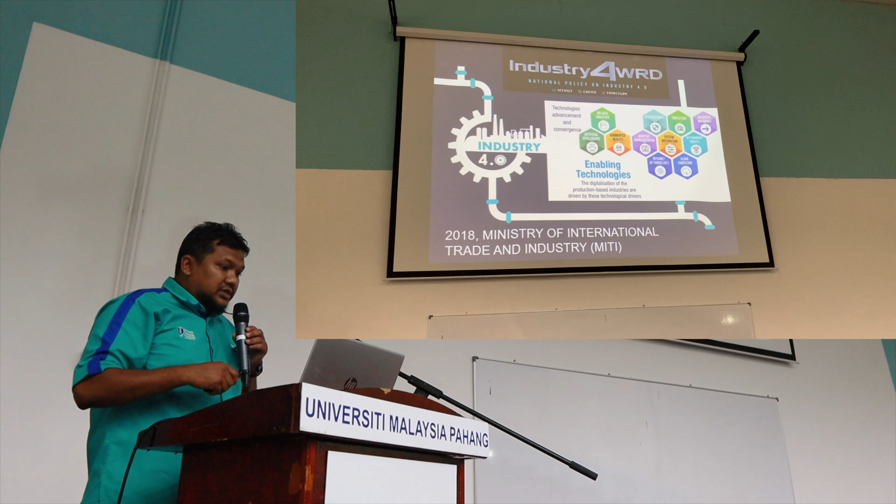Okay, about Industry 4.0. In Malaysia they have a national policy, officially launched last year or two years ago, about Industry 4.0. So here are all the enabling technologies. Most of us should prefer this as your initiative, mainly on the technology advancements in big data, AI and augmented reality, and the rest will become enabling products.

This is not only related to research, but if you follow the EAC manual, when we revise the strategic plan and the program itself, we need to consider these Industry 4.0 elements. Similarly, when doing accreditation visits, they will ask about this in your program. That is a mandatory question. So this is mainly the elements mentioned.

We should encourage our syllabus to include additive manufacturing, AI, big data and so on, related to mechanical and electronic manufacturing. And mainly the rest might relate to electrical electronics.

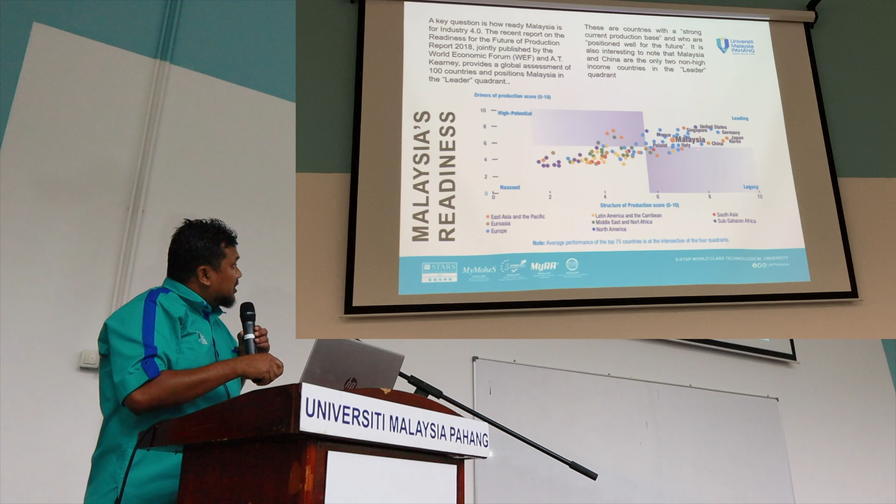And in the blueprint, they highlight Malaysia's status. We are actually in a good starting point where, according to the report, we are in the leader quadrant compared to France, Poland and other countries. So we are on the right track to grow Industry 4.0 forward.

The thing is, it's up to us, the lecturers, to change ourselves. If you don't know something, you need to learn it. You can have training on how to get your add-on research into these elements.

So for myself, we focus on Industry 4.0 where in manufacturing itself, for my setup, my allocation is mainly on the machinery and equipment side.

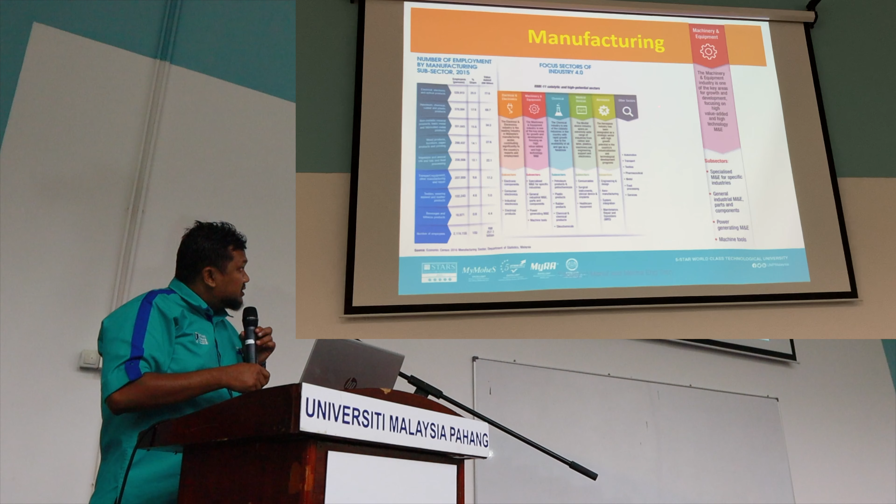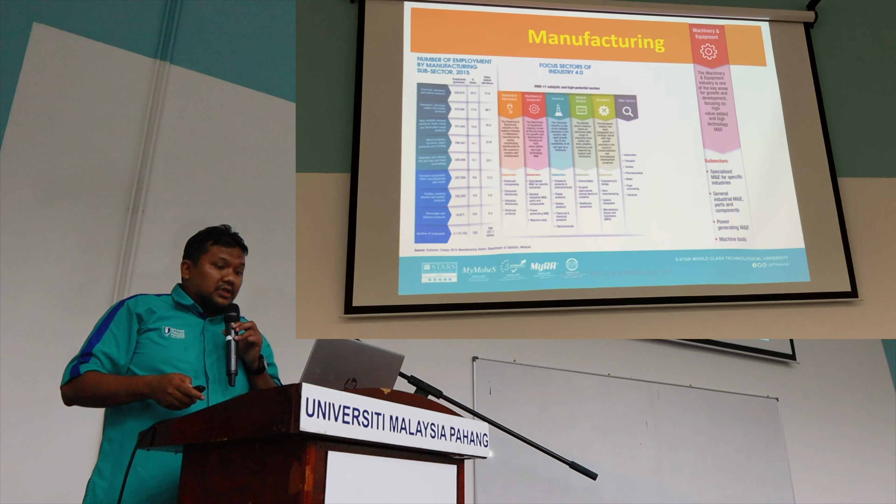So we talk about this application in the industry. However, as an engineering college, we need to focus on theoretical aspects. Basically, the application should be based on the theoretical. So my base theoretical is mainly on the vibration itself.

So that's why in the introduction, Dr. Zawi introduced me about vibration, where during my study in Sheffield, we needed to take two fundamental courses on vibration in order to enhance our knowledge. So the same thing, you should encourage PhD students, if the body of knowledge of their research requires certain things, they need to take the class as fundamental to enhance their knowledge.

So myself, theoretical based, this is about chatter vibration. We have high productivity, maybe for all companies, all production high productivity. However, for this machining problem, there is a dynamic deflection of the tool which generates unstable cutting.

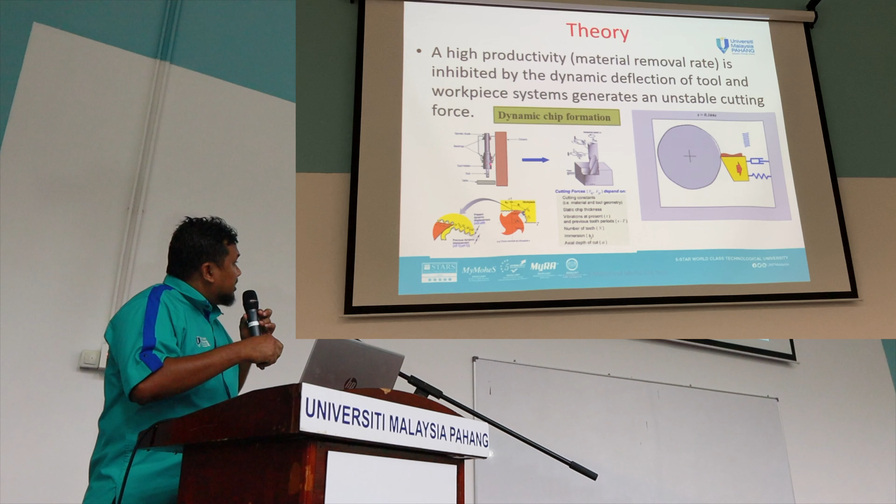So from the figure itself, here is the turning process, and here the milling and the drilling. So for unstable cutting, you will have an out-of-phase behavior.

So there is an analytical method to derive these chatter vibrations, where it can also be defined as a sudden vibration amplitude, when the input energy exceeds the energy dissipated from the system.

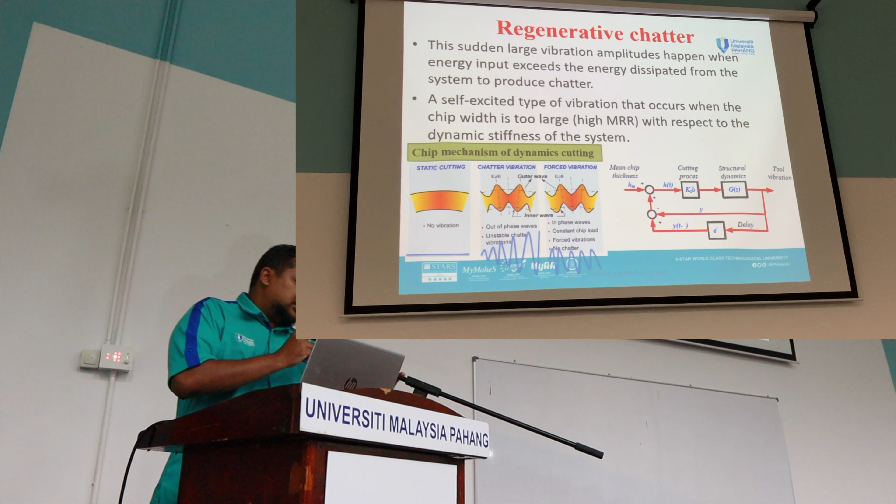Or the other definition, it's also about self-excited vibration, where this vibration has the same definition actually. When you have high productivity, meaning the chip or metal removal rate is too high, it causes inconsistency in the dynamic system.

So in theoretical vibration, you can have stable, no vibrations. You can have forced vibrations, and chatter vibrations.

The main problem of chatter vibration is because we have out of phase, in phase waves that compare the same with forced vibration, causing unstable force to happen.

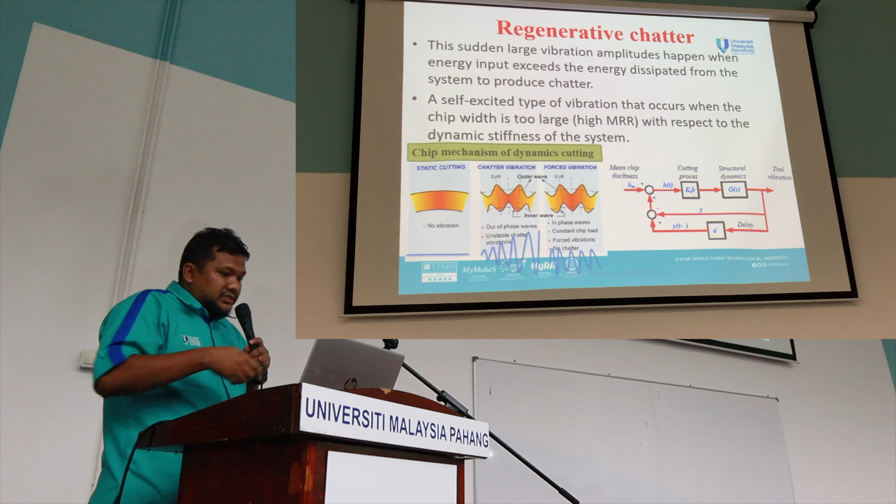So this is the closed loop diagram. When you have cutting, initial cutting, but before that there is a delay of certain time which causes the vibrations. So based on this phenomena, it will cause these problems.

So maybe the problem of machine tool damage, the tool itself breakage or wear, and also when you try to produce the product from machining, it will be out of dimension tolerance, and also the main thing is the surface finish.

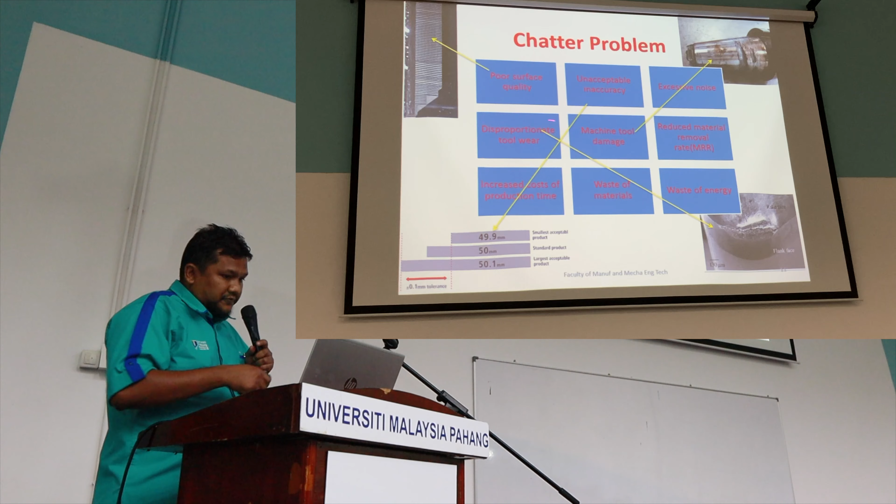And so you have chatter vibrations. Compared to this one, you can have higher production with good quality of the machined product, and also less wear of the tool.

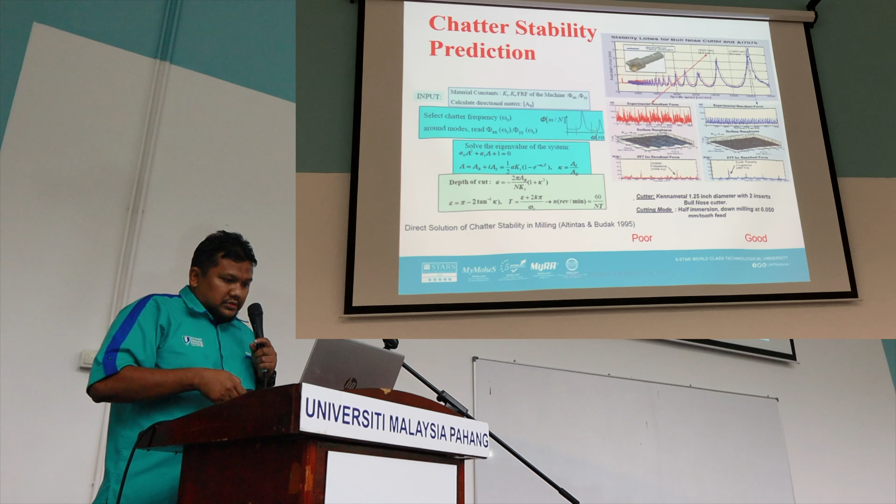So here poor surface finish, a good finish.

It can also change the tool geometry, and then we get a new tool geometry. For our cases, this is a cutting tool. For example, you have a tool, any tool, a four-flute tool, instead of equally spaced at 90 degrees, each of the four teeth here.

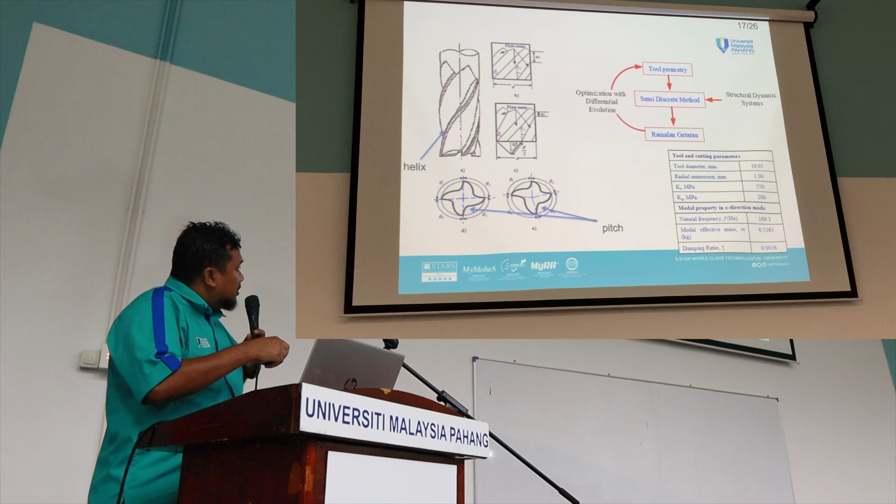However, for our cases, we have irregular spacing. We will have different helix, different pitch here. The angle is not the same each other, it doesn't mean 90 degrees. So based on this formula and everything, we try to find the optimum value of the parameters.

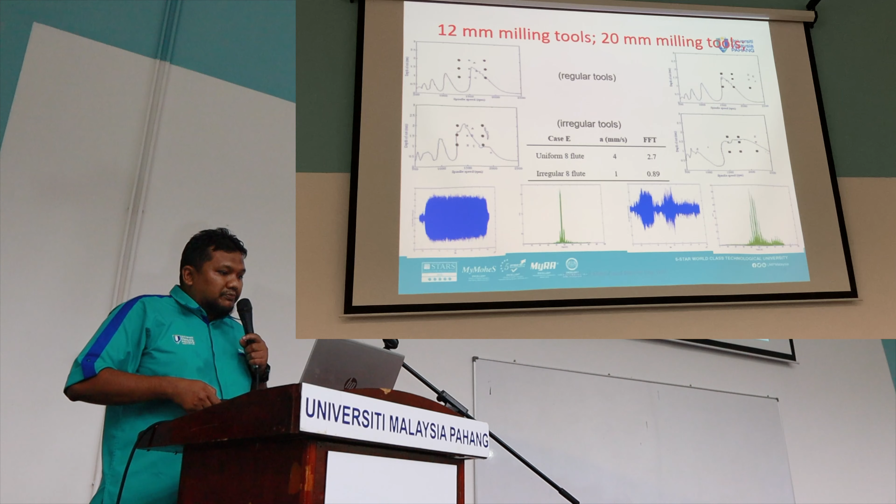This is an example of the Sapura project, we compare a 12 and 20 mm tool. Mainly we get the result where you compare regular and variable tools, where you can have a higher depth of cut compared for both tools, with similar cutting speed. So maybe we increase more than 30%.

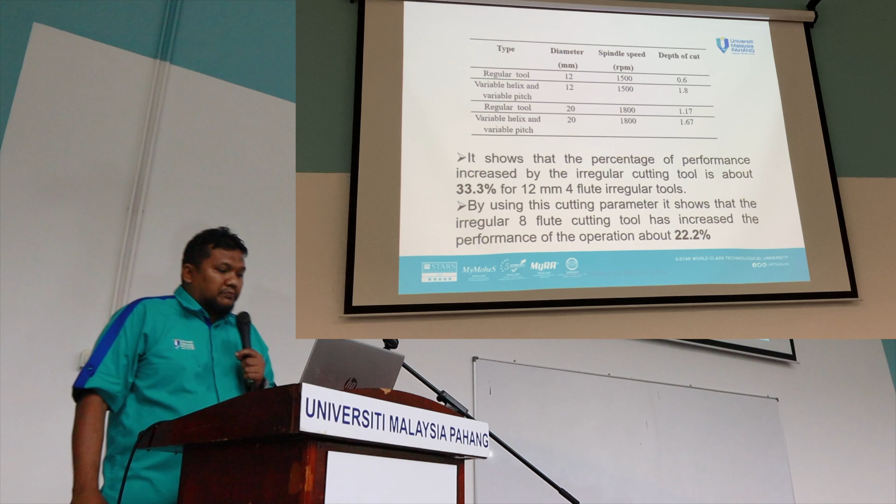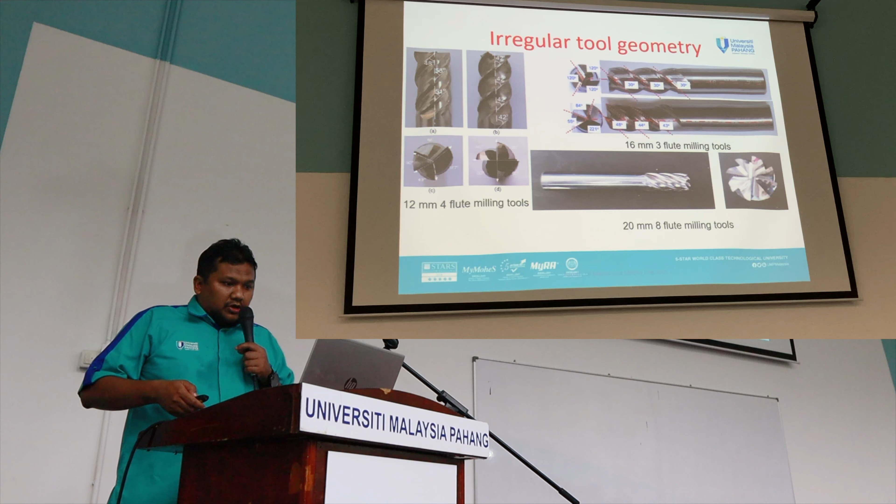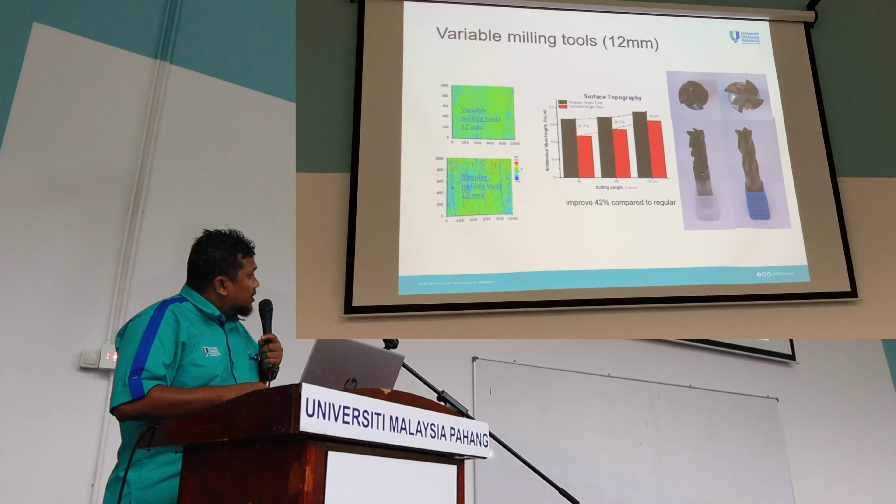And when we compare in terms of surface variation, here you can see the difference in Sa, surface topography. Almost you can see 42% comparable. This is the uncoated and coated tool, usually for the 16 and 12.

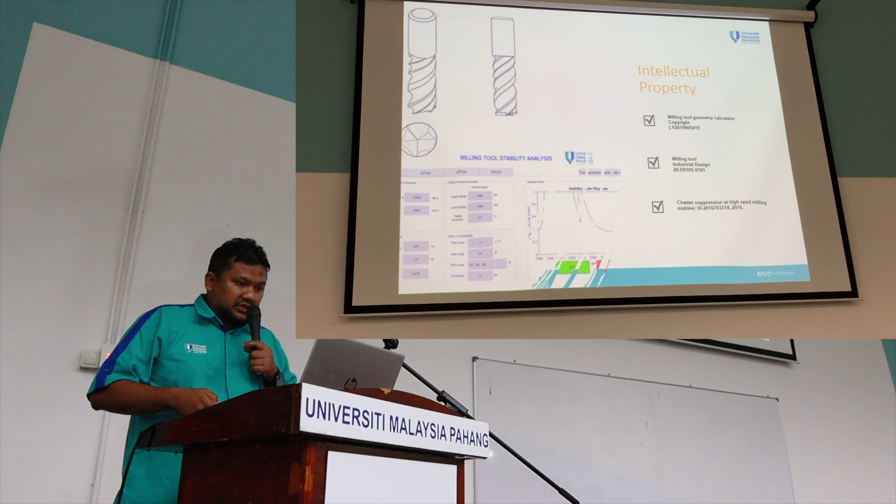And here is the industrial project, Sapura. So we compare with the current tier 2. We can compare with this one we run inside their production line. We compare their tool and our tool. Our tool is comparable with their tool, and it can sustain up to 3,000 cycles. This is the rough value. So we can sustain as well.

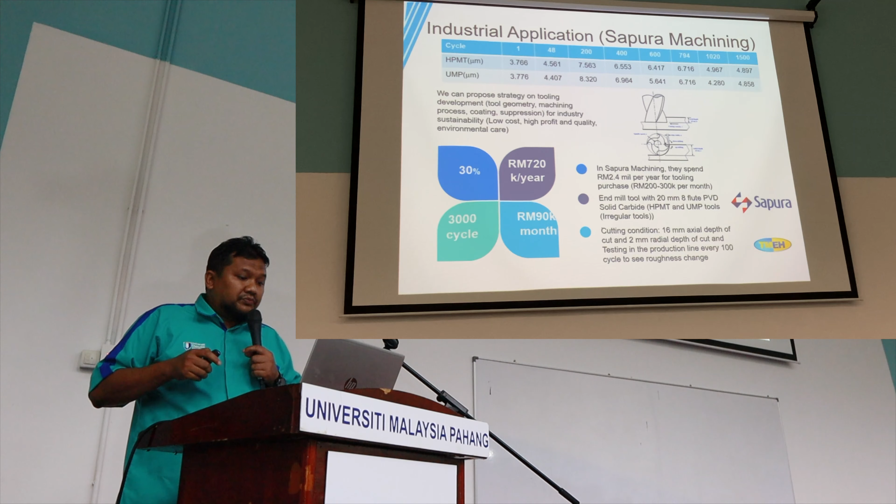Means if you use our tool, you can save 30%. In Sapura, the main problem is they spend 2.4 million a year for the tool itself, because this tool you use and after it wears, you throw it away. So it means 200 or up to 300 K per month. So if you use our tool, you can save 90 K per month. We can have up to 3,000 cycles.

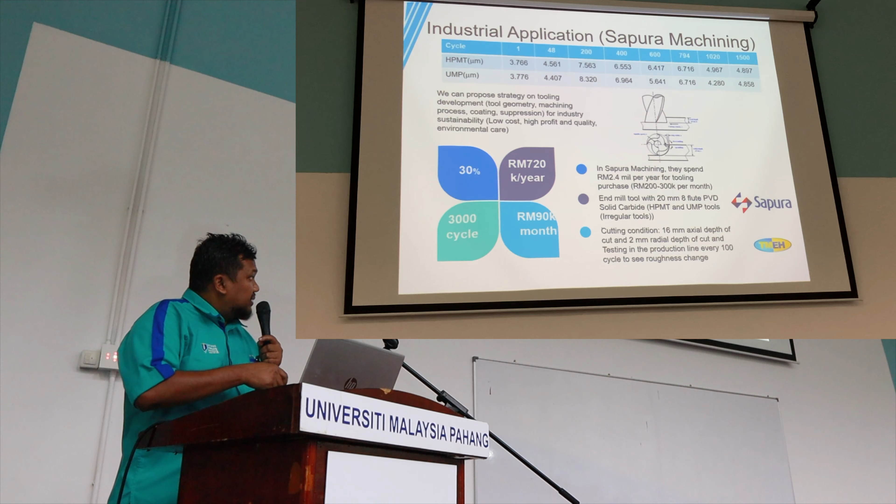So here is the method of testing in our line in Sapura machining. And here is the outcome for the first project on the green tool. So we have exhibitions on the ITEX, and also activities. So here are the 3 papers, and the graduate students, mainly 1 PhD and 3 masters, and then 3 PhDs given. So before we go to the next project on the tool, we can have this

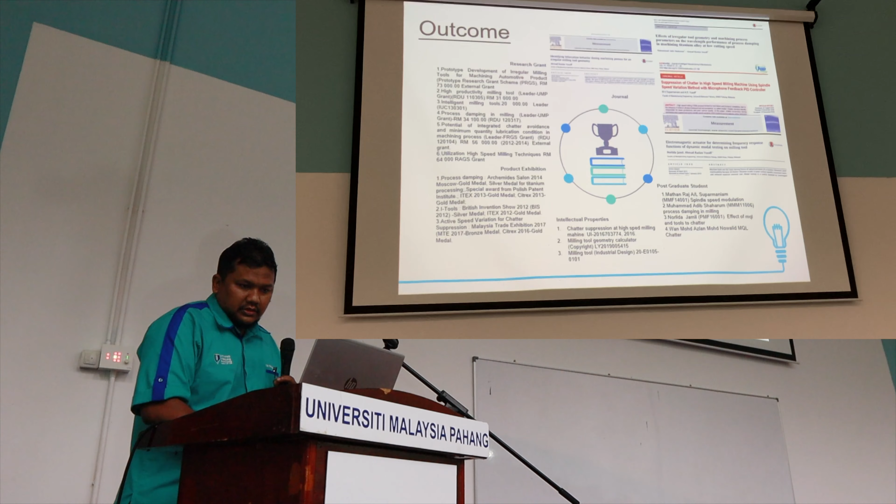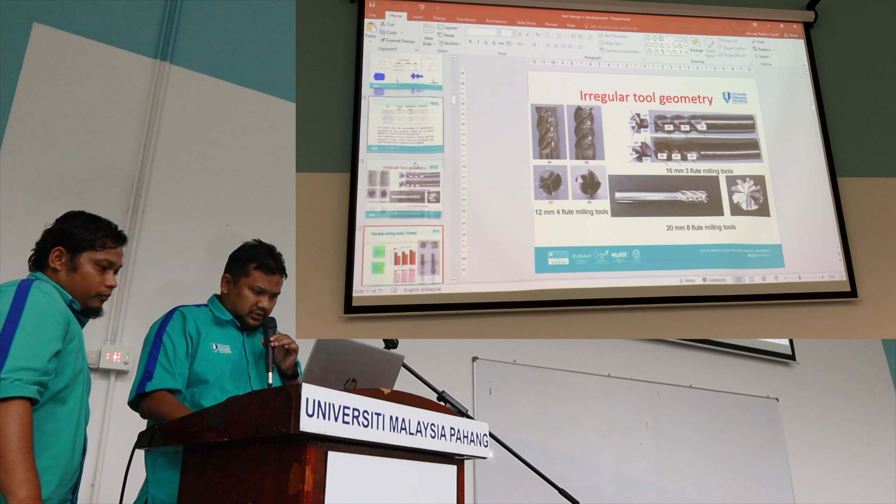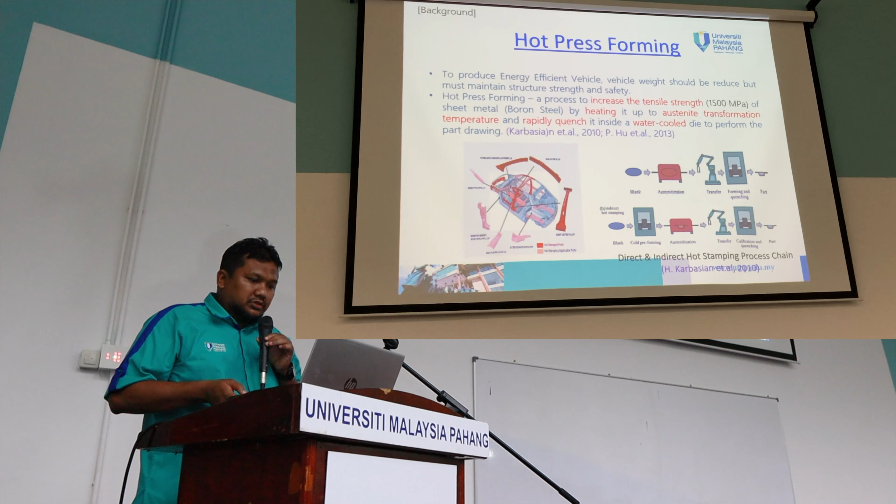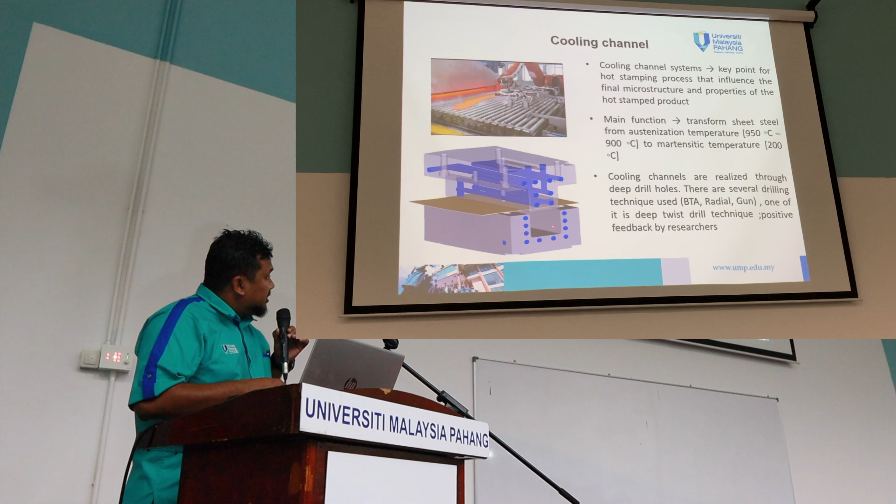The second project is mainly on the drilling tool. So this is basically drilling. This project is related to the problem of producing hot press forming sheet metal based on steel, heated to a high temperature before it is rapidly quenched. So we use a tool with cooling inside it. In order to produce this cooling, we use this cooling tool.

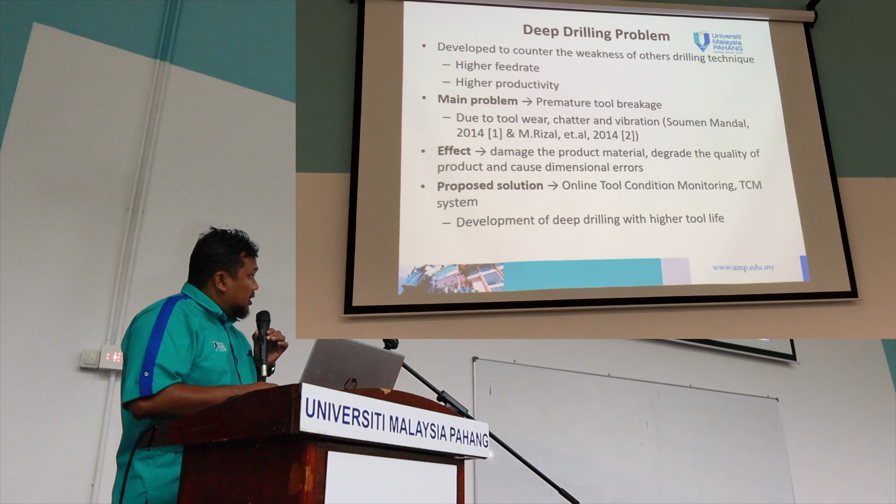And the problem is, with a higher feed rate and higher productivity, we will have tool wear. So we produce our online monitoring together with the tool. So the objective is to produce online monitoring and also have optimum tool geometry. The first experiments are based on cutting speed, feed rate and depth of cut.

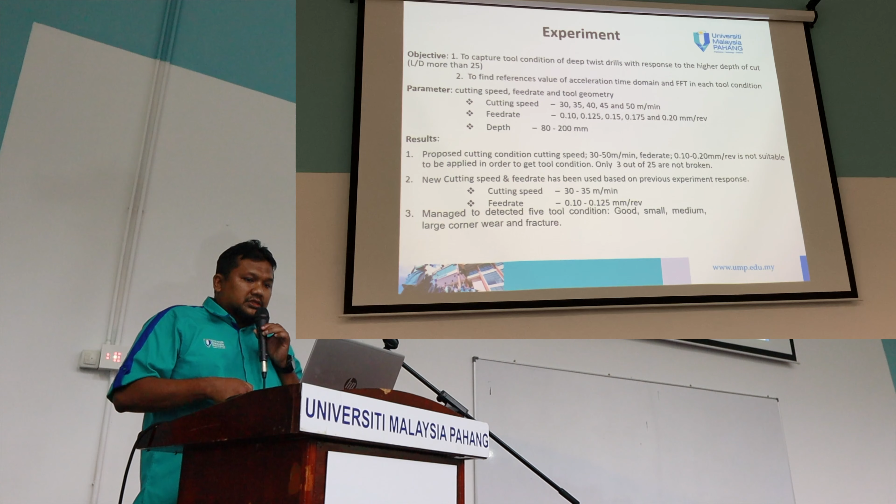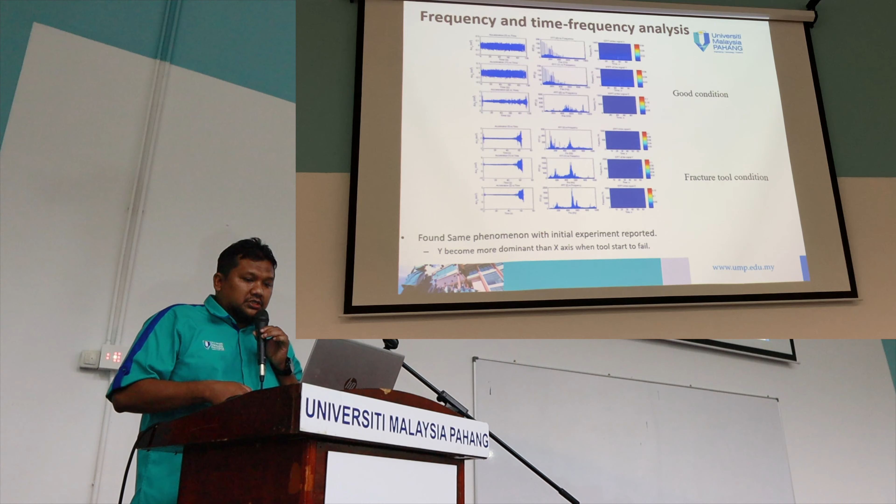So we produce the results of the accelerations from the tool and also from the workpiece itself. So we can define each one as good or not good tool conditions, tool wear. You have these kinds of tool conditions: good, small wear, medium wear, larger wear, fracture. So from these classifications, we set the threshold for our condition monitoring system, based on X, Y, Z.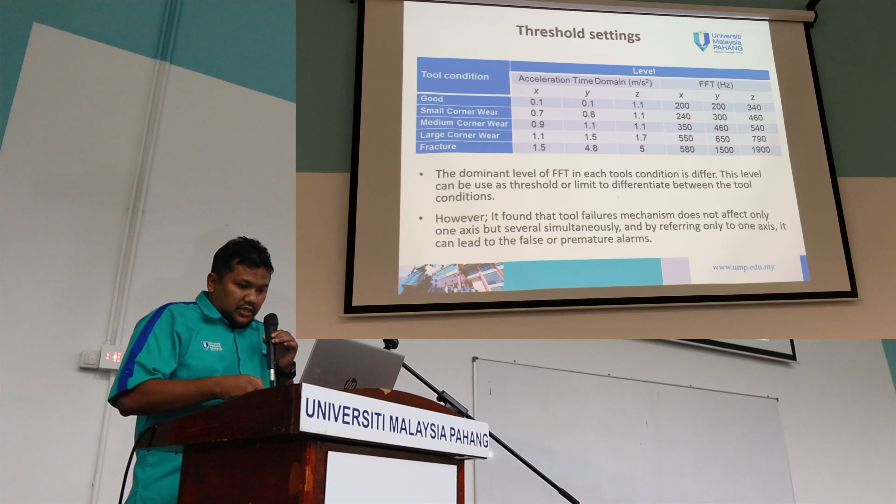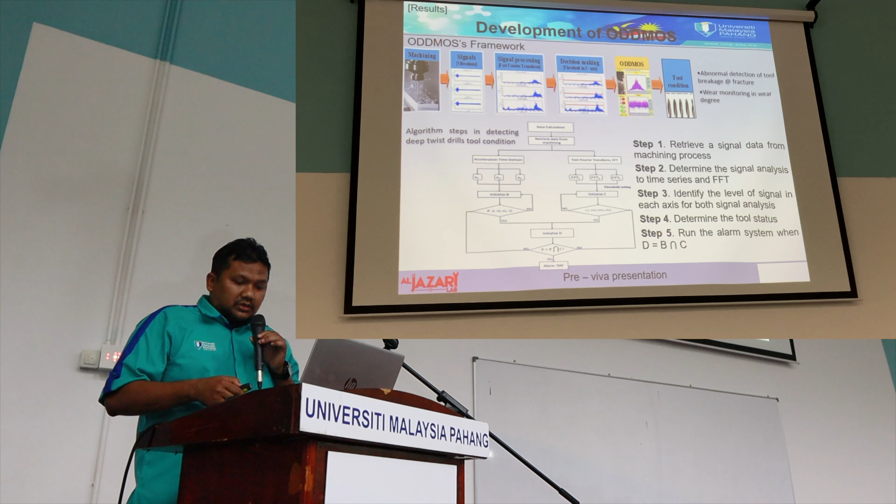Even though X and Y are in the same direction, they actually give different results, and also the FFT is different. So based on this value, we put our algorithm inside, and we test again to see whether it can detect or not during the tool's use. We try to prevent big fracture. So early monitoring is better.

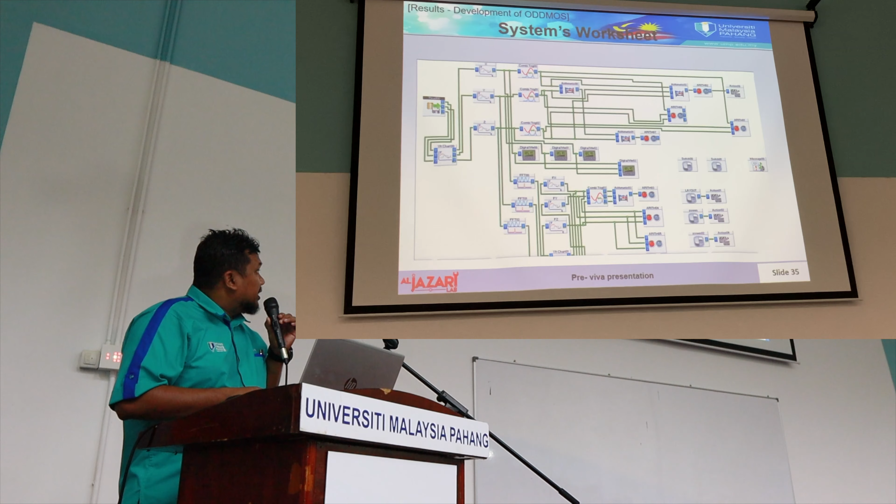And here are the features behind the GUI, and here is our system to detect whether the tool is stable or unstable, and this is just the software. And more important is our tool geometry. So we use tool geometry with different point angles. The detail of the point angle is here.

What is point angle? It is the angle of the sharpness, and we have the helix angle and also the chisel edge angle, which we define and change accordingly based on these parameters to create our design of experiments of 27 experiments. So we study their main effects, and at the end we get this ANOVA, and we can choose which one gives the lowest kurtosis value.

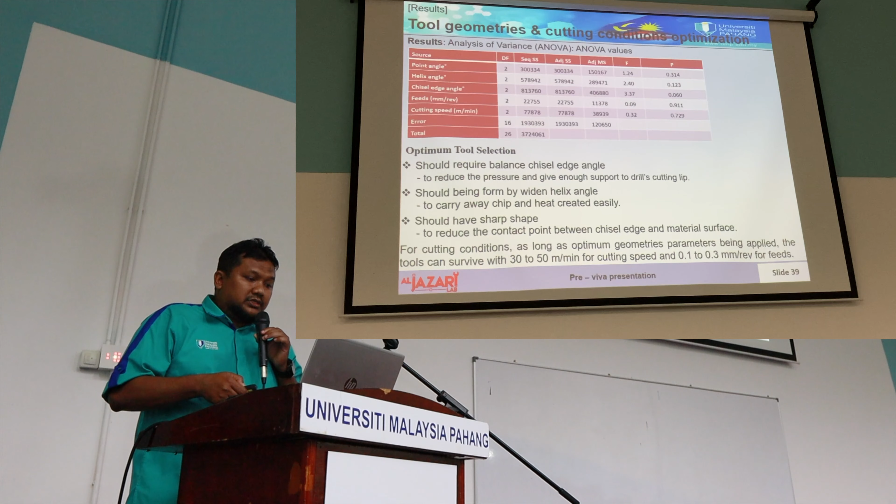So based on the kurtosis value and also the desirability method, we get 125, 35 and 120 for the chisel angle and the other two geometries, which give the lowest kurtosis value, meaning the lowest vibration signal from the experiment. So these can be defined from this second research on the tool.

So we got awards at AINEX and also ITEX, and also we got our e-science grant and one IP on the invention, and also 3 journals, and the collaboration is mainly with the company itself and also the company who manufactured our drilling tool.

So this is very deep drilling, because the definition of deep drilling means the length divided by diameter is more than 16.

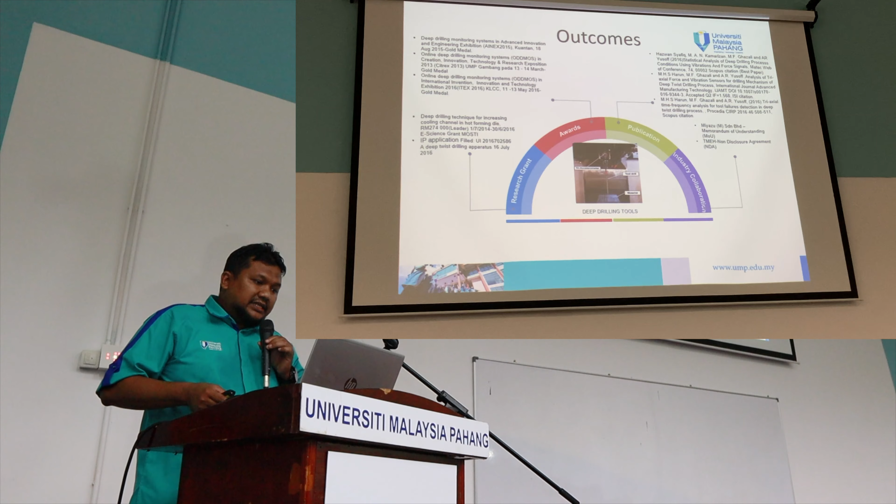And the last part is on the bone drilling. The bone drilling is the latest one we did with one PhD student. So mainly for these sections, we divide into motivations, material methods, result discussion, and the conclusions. So for motivation, we have introduction, the problem, objective, literature review.

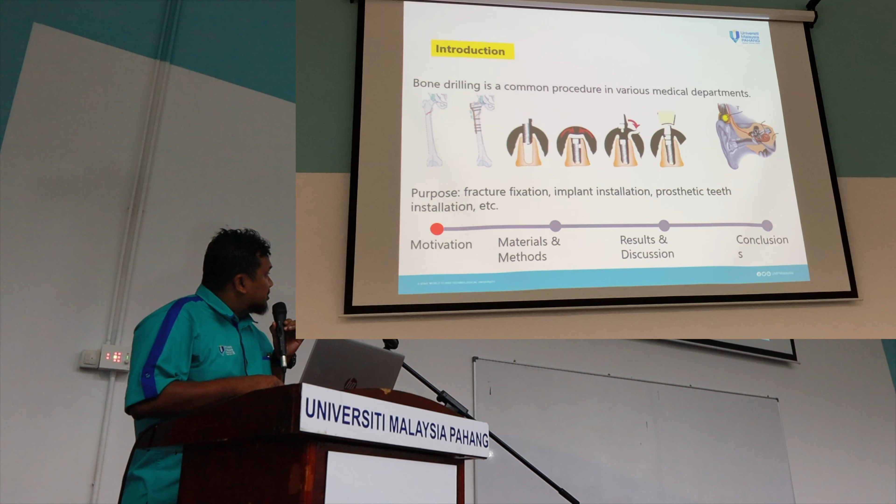So mainly the bone drilling relates to a common procedure in the health or medical department, where they use it either for fixings, implants, or prosthetic installations. However, the problem is when you drill something, when it exceeds more than 47 degrees within 5 minutes, it will kill the cell. I mean, you have the osteonecrosis problem.

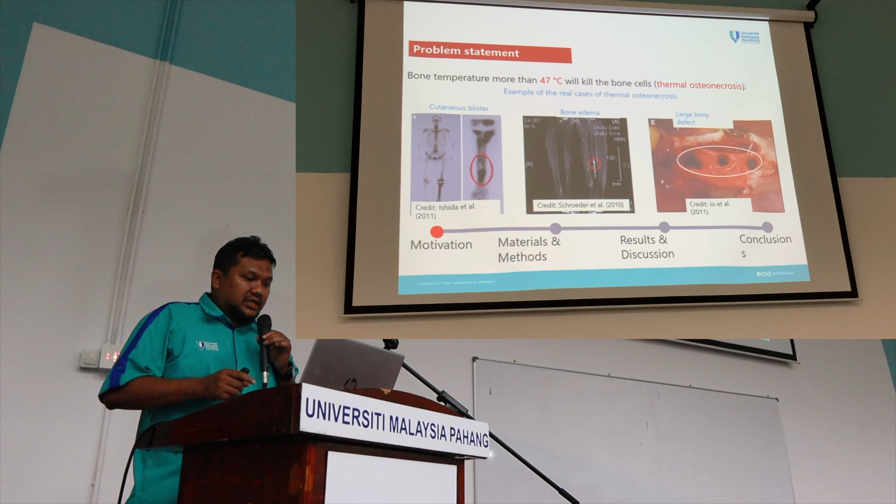So it's not good, because it will cause the problem of the blister, the bone edema, and also large bone defects. And also it will make our fixture loose, because the cell does not work anymore as a live cell, because it will kill the cell. So how to prevent this one?

So we try to study it, mainly on the simulation, but before that we compare the bovine and also the porcine, which one is suitable. Can we use our human bone? So first we compare, we get our result. Maybe the bovine has almost similar behavior to the human bones.

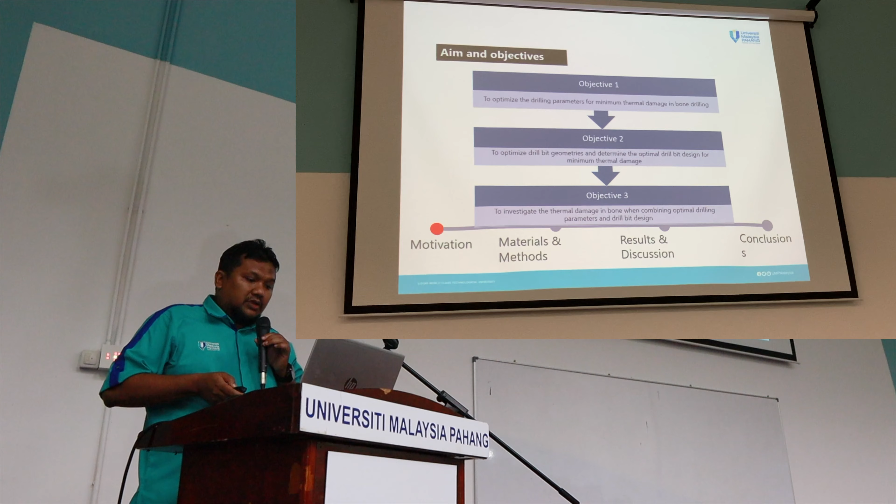So we use cow or the bovine as replacement to the human bones, and also we try to optimize similarly the cutting process parameter and also the geometry before we combine both to get a better result.

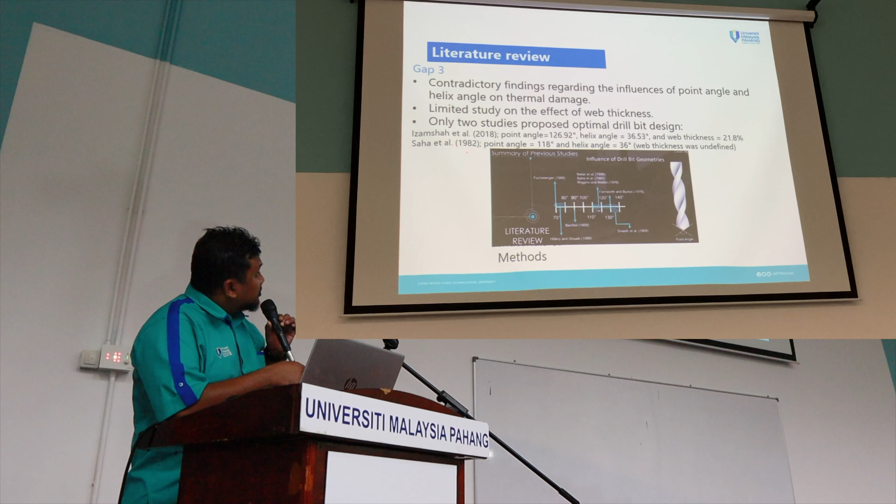So mainly in the literature they contradict on the influence of the geometry, either of two geometries. They focus on point angle and helix angle. But in our case, we add the web thickness. Web thickness means the core of the tool itself. So the study very close to us is Izamshah, and the next one is Saha. So we compare very closely.

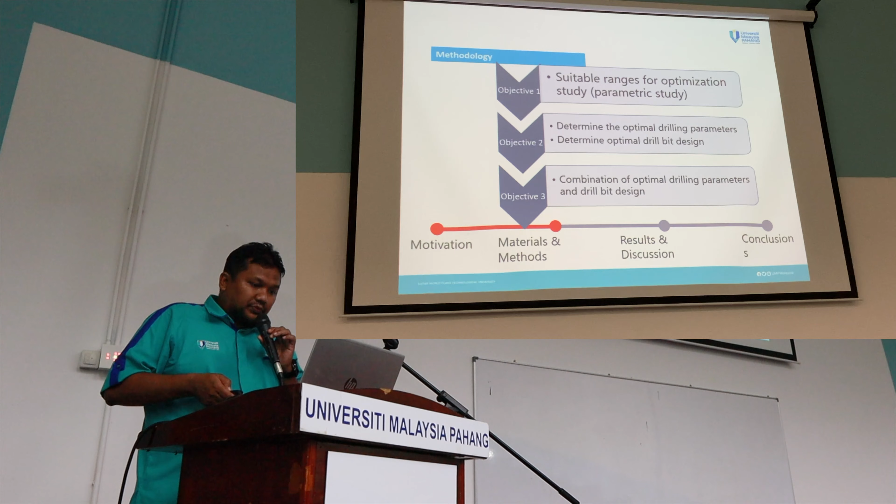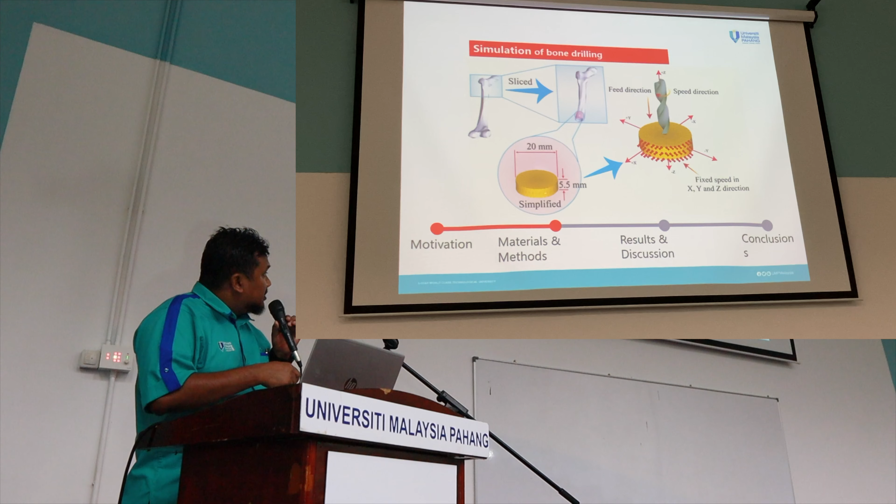So mainly we study simulations. We use DEFORM software for simulations. First, we study the suitable cutting range, or cutting drilling parameters, before we optimize the drill bits. So here in our simulation of the bone, we just make it a cylinder with a certain size, which is suitable for drilling simulations. We have the real tool here for drilling, exactly as in the drilling operations.

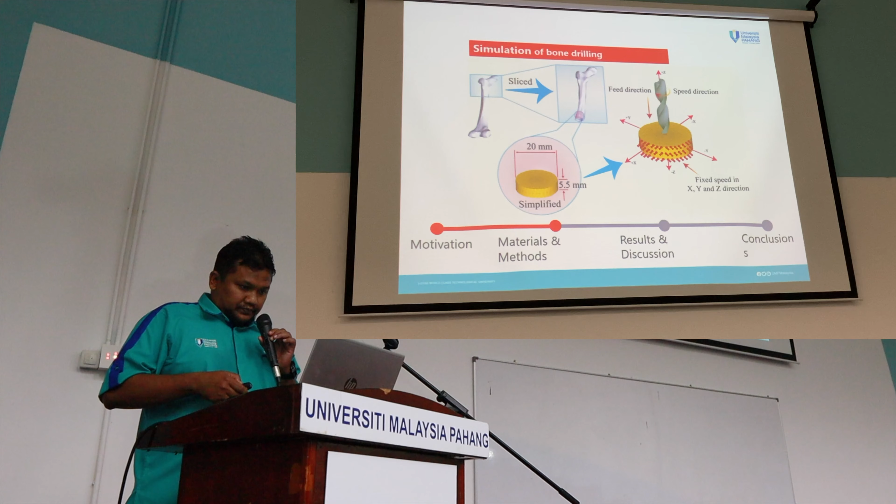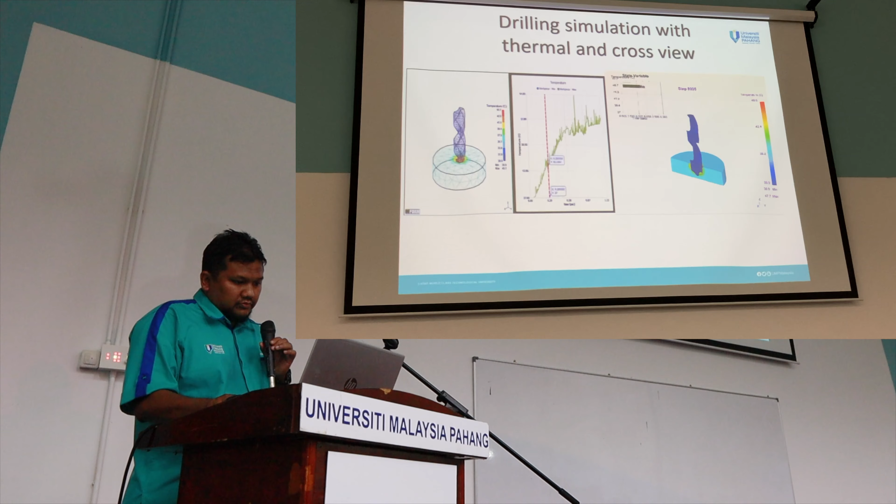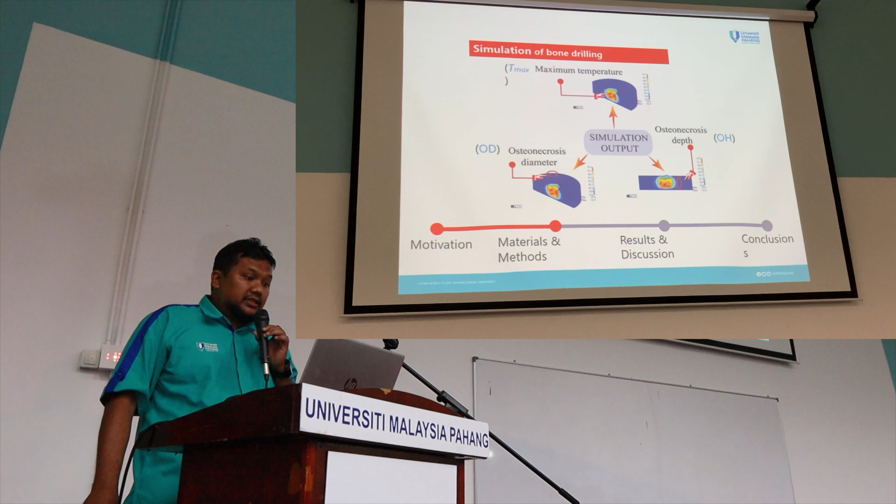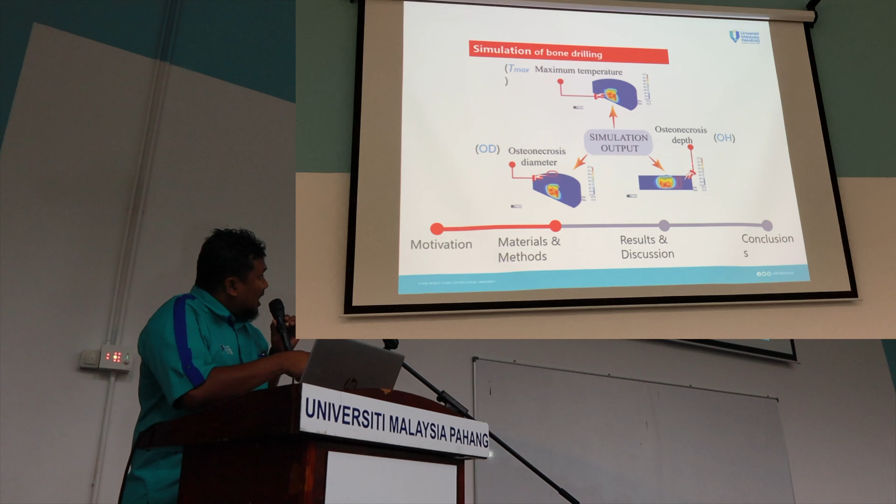Okay. From those simulations, the most novel part of the study is how to calculate the necrosis diameter and also the necrosis depth. So based on the simulation result, we need to count it together with the maximum temperature. So we need to count the necrosis diameter and also necrosis height. So based on the calculations, we also compare with the experimental. You can see the difference is less than 10%.

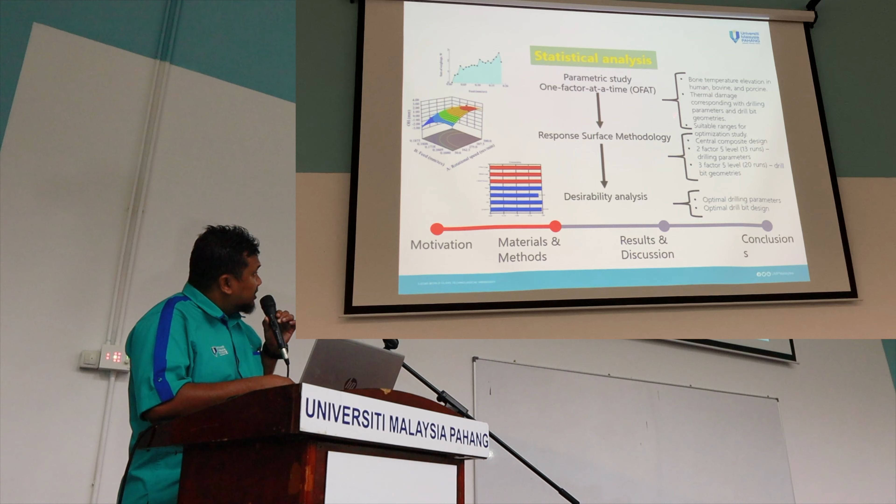So we cut cow bones, okay, and then clean them before we do experiments using a thermocouple, okay, to see the temperature difference. So from that statistic, as I said, how to calculate the suitable range of temperature, the range of the speed, and also using the response surface methodology to calculate which gives you the minimum temperature to prevent the bone necrosis. So this is the result of the study.

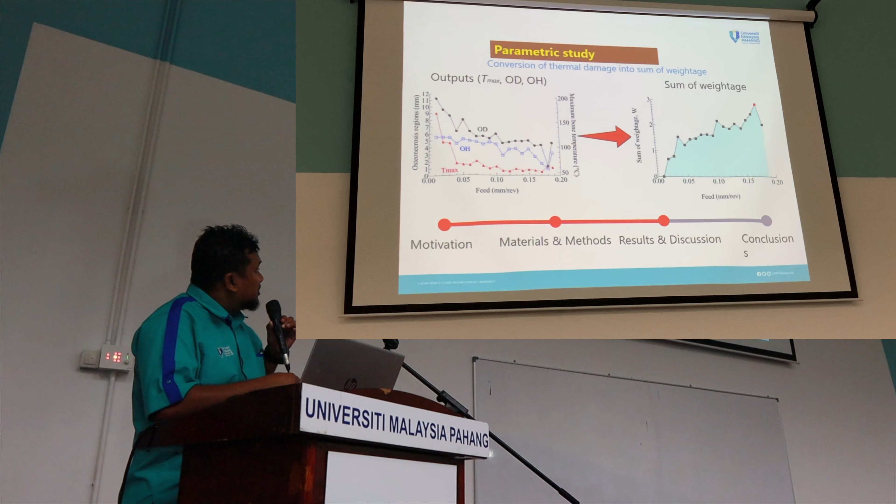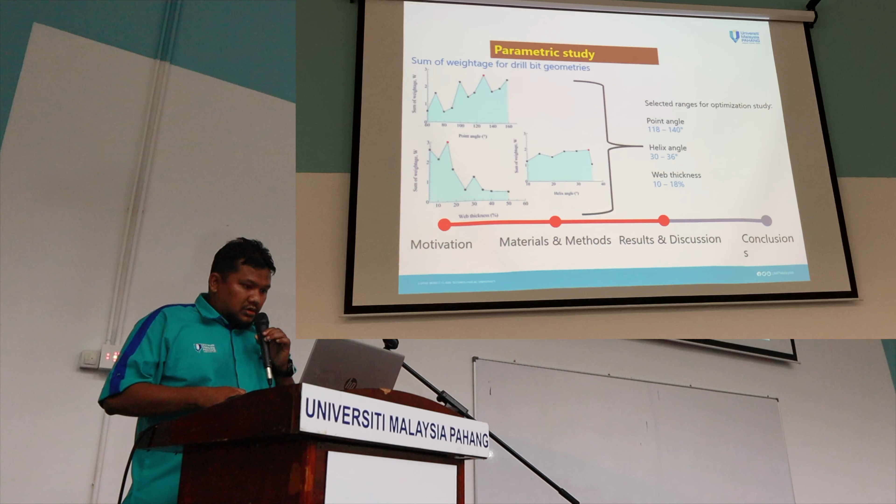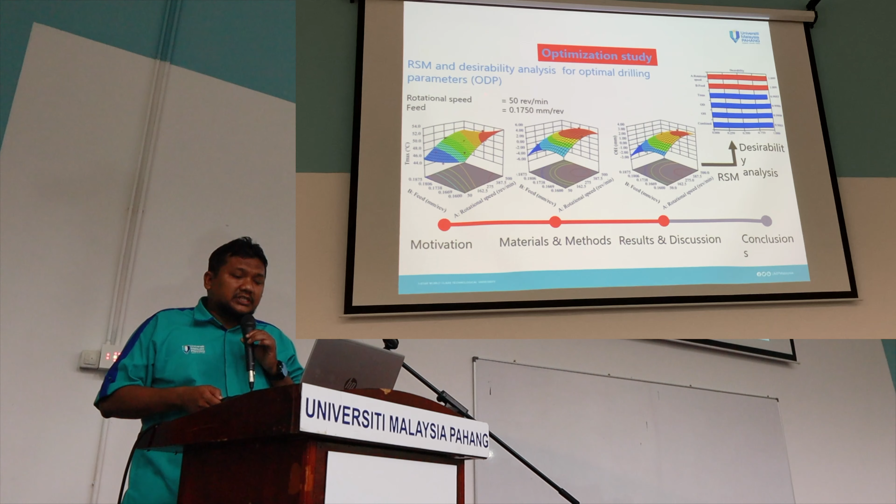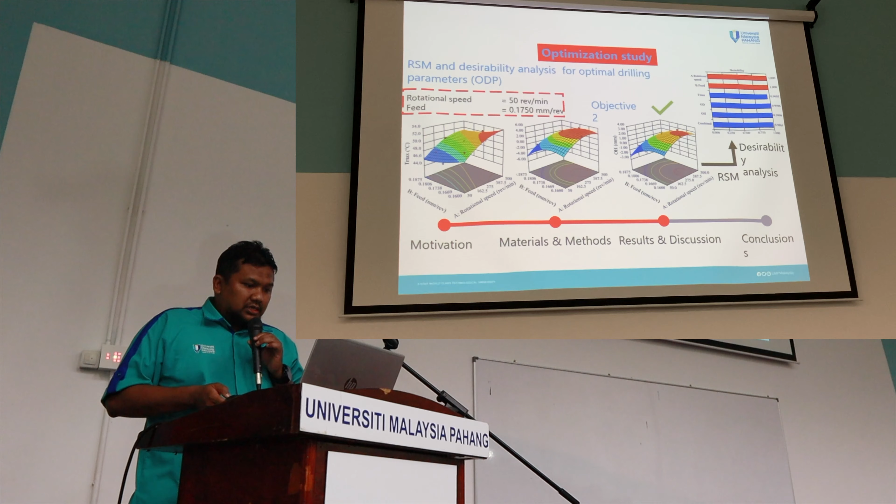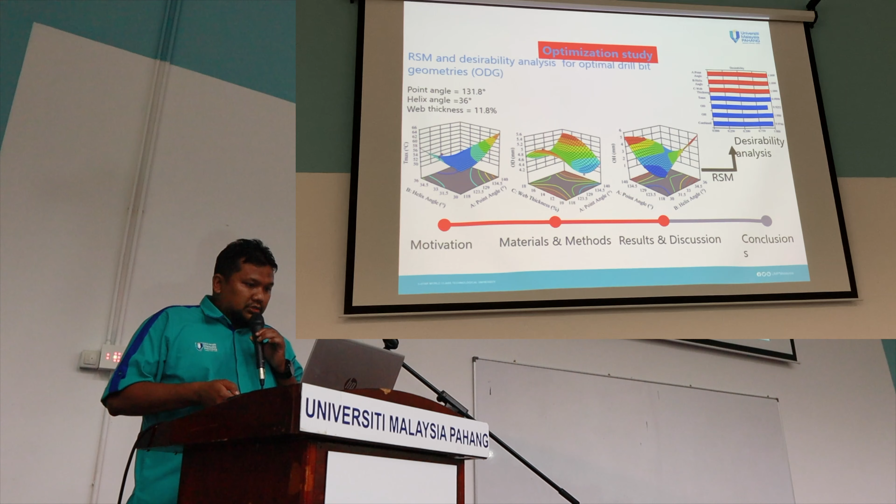And here is our analysis of the parameters. So we will get the optimum one, maybe the lower rotational speed, and the feed, which gives you the lowest temperature or the lowest diameter and lowest depth of the osteonecrosis. And then the last one, optimize the geometry. Okay, the geometry will get around 131, 36 and 11% of web thickness. It gives you the lowest necrosis effects, and then we combine them together, and you can see the difference between our method and other methods.

Where you can see with our method we see almost no oversize diameter and also no depth of necrosis, and the temperature is still the lowest compared to other parameters in the literature. Similarly, when we combine both cutting parameters and design, and compare the existing surgical drill with our drill, ours gives the better result in terms of those three objectives.

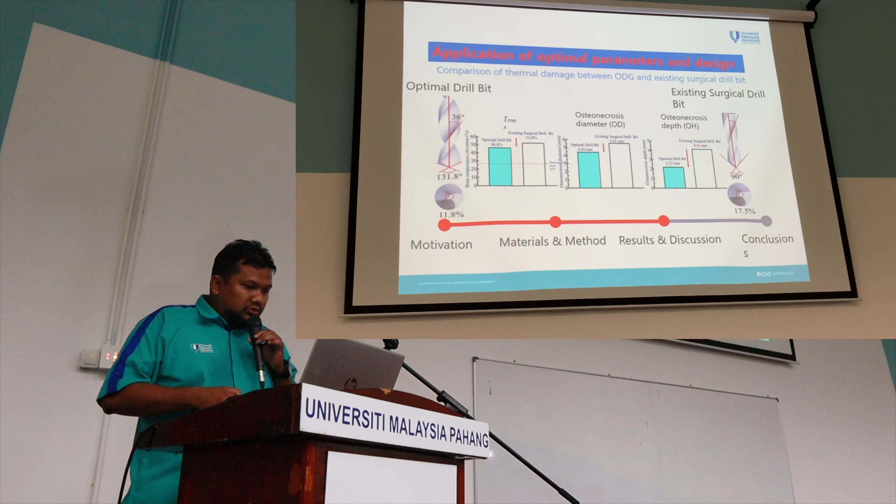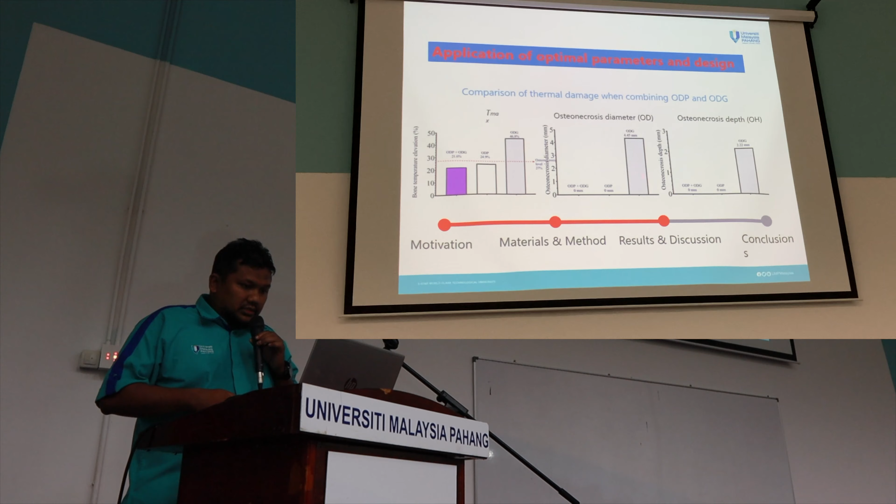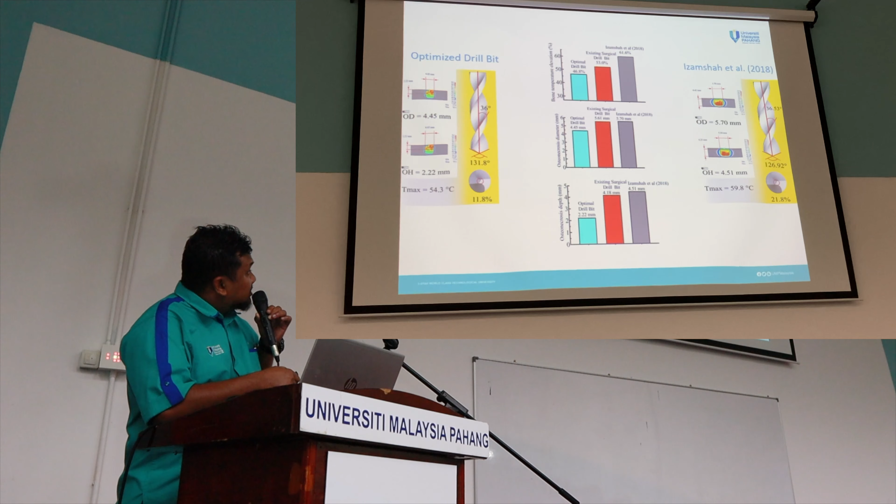So similarly, when you apply both, you can see the current tools on the market cannot produce anything compared to our tool. So when you compare with Izamshah, our tool is better, and also with the existing surgical drill, for the objectives of minimum temperature, minimum diameter, and minimum depth.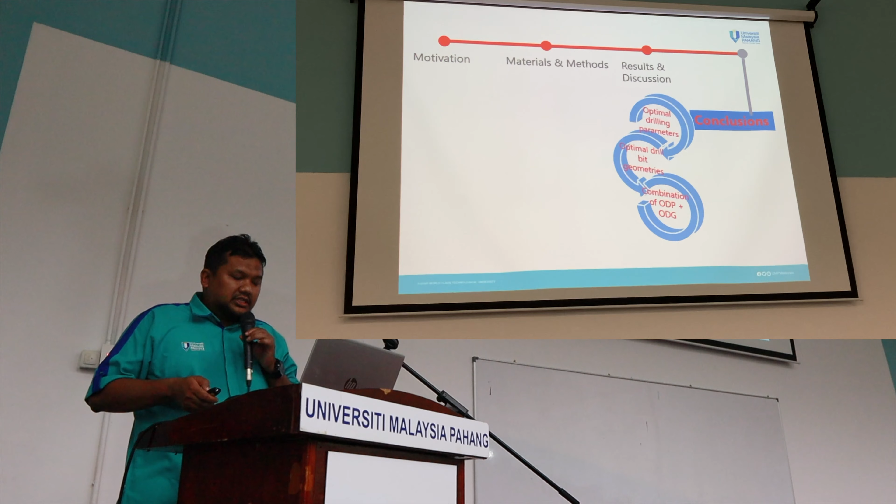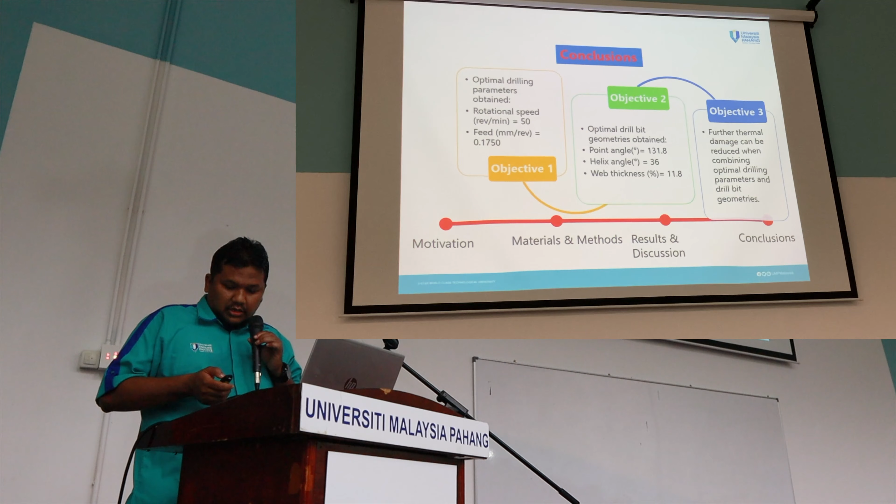So that's the last project on this tooling to achieve those three objectives in the cutting process optimization. But most important for this talk, we focus on the optimal tool geometry for drilling bones. The main output of this research is publications. You can see we have 6 publications, 2 in Q2, 1 in Q1. That's the main output from the research.

And for future and current research, we are looking at these 3 projects. The first, from the right side, is a chip breaker for turning. This deals with Sapura Machining. They have a problem with continuous chips while turning automotive products, where the continuous chip causes wear of the tool and other problems. So we have one PhD student on it now.

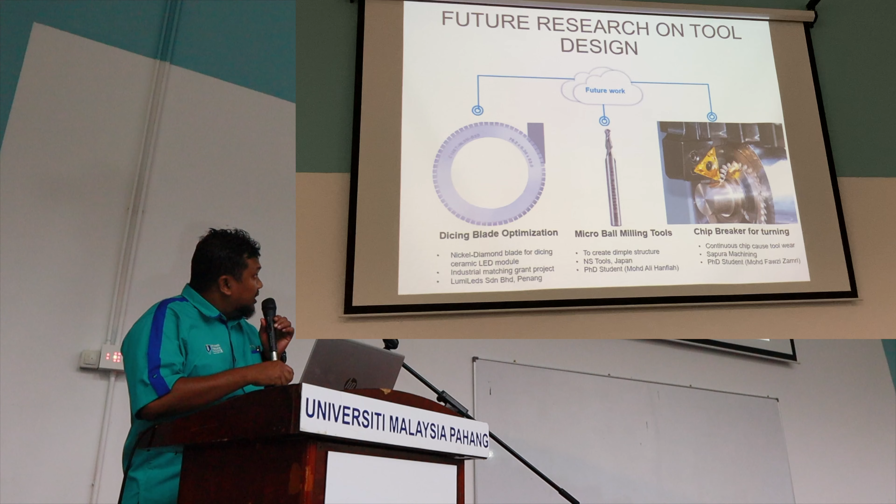The second project, the middle one, is micro ball milling. We try to create dimple structures. For this one we visited Japan 2 years ago, to NS Tools. The student responsible is a fellow from our staff in FKP, Muhammad Ali Hanafiah, who did this micro mill geometry optimization.

And the last project deals with dicing blade optimization. The dicing blade is used on microelectronic products to produce LED modules. This tool is made from nickel and diamond, and the price is around 300 ringgit. The problem is the lifetime is low compared to their standard. The standard should be 4,000, however at up to 2,000 it's already worn. So we have this matching grant with Lumileds, Penang, to apply our method of introducing a new coating to enhance the lifetime.

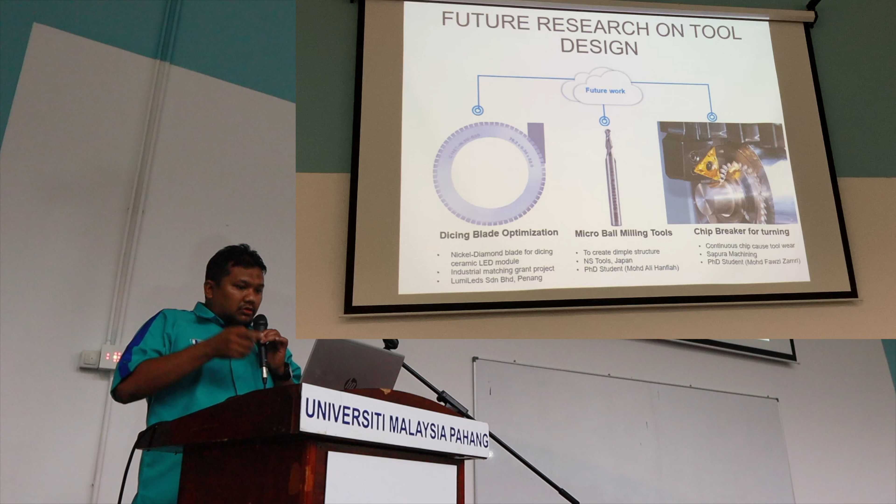I think that's the conclusion: we have 3 tools in current development, the milling tool, drilling tool, and bone drilling. And this is just my journey: from 2010, senior lecturer in 2014, associate professor, and last year I became professor. And for this year,

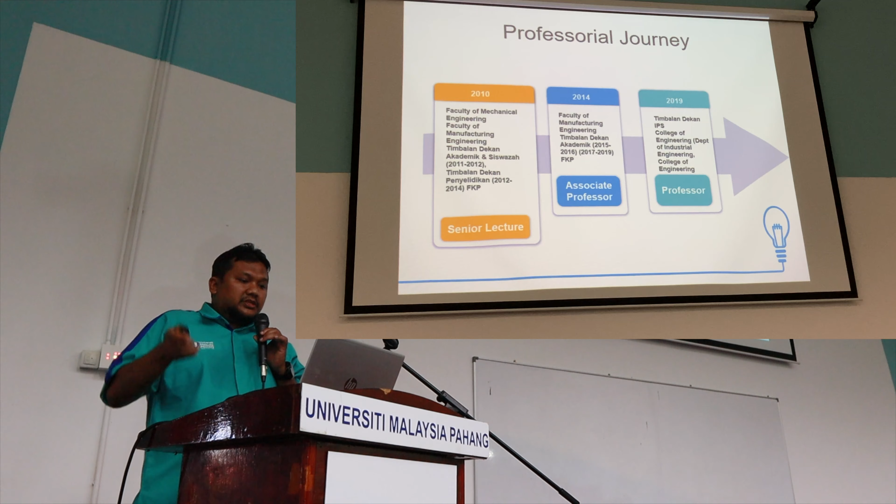And the next project is on module development. This one deals with Firdaus. We have several projects. My part is to develop TVET training, a proposal for the technicians and polytechnic lecturers. We proposed our module on the smart machining process. So we developed the module, and they gave a quotation worth around 42K. This should have been in March, however due to COVID-19, we just finished in August.

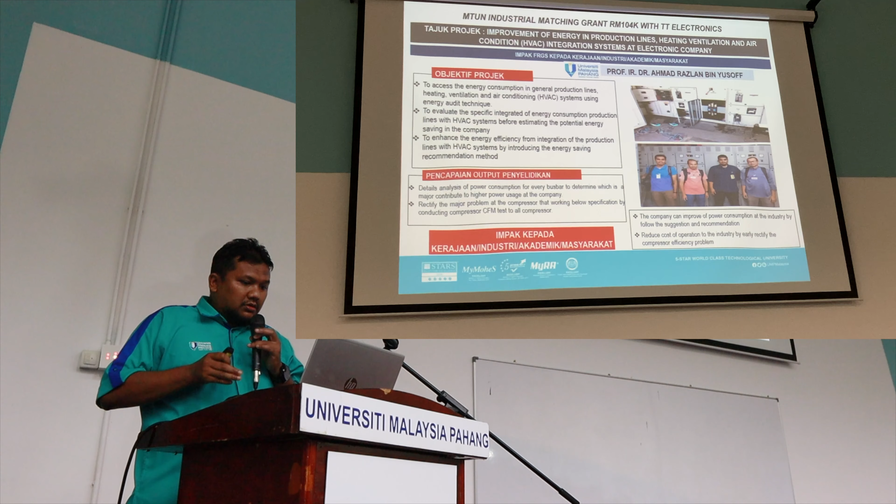My collaborators during 10 years of work in UMP. I think that's all. Thank you.

Thank you, Prof. Razlan, for the interesting presentation and really comprehensive research in the machining field, from the automotive industry to healthcare components. The output of his research is really interesting and encompasses a lot of manufacturing interest.